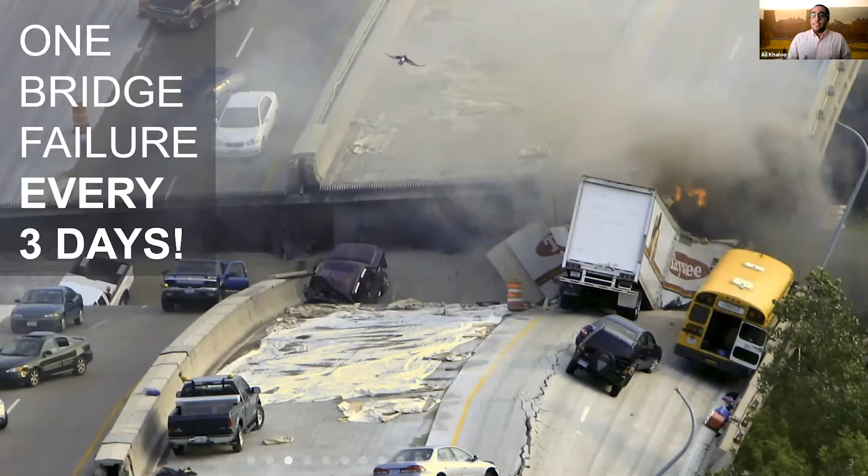So let's take a closer look at why we essentially end up in this mess as a society and as an industry. The current methods of inspection, assessment, and management of infrastructure are precarious and outdated. We have to send inspectors out in the field, and they're using bucket trucks, rope access, ladders to get access to different parts of the asset, and they're using naked eyes to detect teeny tiny damages on miles and miles of infrastructure. After doing all of that, now they have to go back to the office, go through their field notes, go through decades of assessment reports, and see really if the asset is deteriorating or not.

What you're seeing in this slide is, as I mentioned, inspectors out in the field in the first column, and in the middle one is an actual bridge report. And it's not just for bridges - this is the same concept we have for building facades and other asset classes, where the engineer comes back in the office and starts to put together a report, which is not more than the location of that asset and a couple of photos of it. And then what you see on the bottom in the middle is CAD drawings.

So the engineer has to go through AutoCAD, draw the elevation, and also draw the damages that they found out in the field. They took notes on a piece of paper, and now they have to digitize all of that in AutoCAD manually, which is a manual and tedious process.

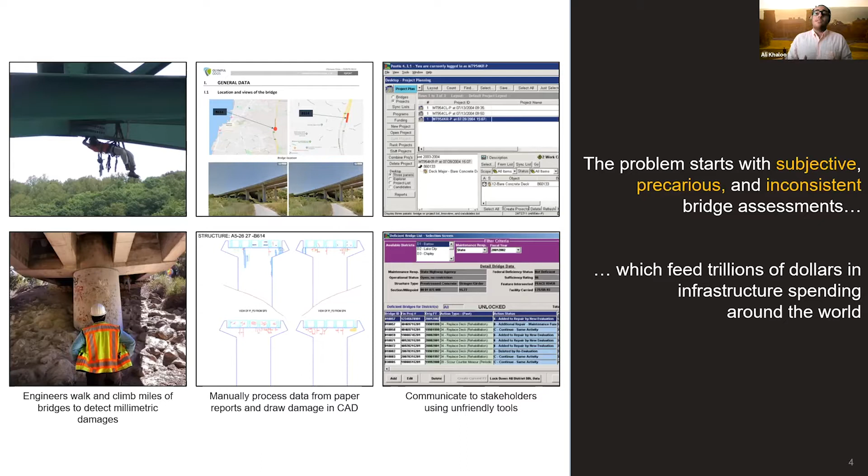And at the end of the day, when it comes down to data management on top of all of this, it's a very much old-school bunch of Excel sheets, which now is hosted in the cloud. So it's very much subjective and inconsistent information that goes in. And at the end of the day, that poor information is what really feeds the maintenance plans. As a result, we lose trillions of dollars of infrastructure budget on an annual basis.

At Aren, what we do is bring our patented technology to tackle all these problems. We are building a business-to-business software-as-a-service infrastructure management platform to assess and manage infrastructure using a unique combination of machine learning, computer vision, and civil engineering. In a nutshell, we are building a digital health record of the asset. Our goal is to reduce the risk of failure while extending the service life of these important assets.

So let me walk you through how our product actually works. First, our software aggregates data that the client provides from different sensors, drones, and laser scanners from an asset such as this one, which is a 60-meter long bridge. What you're seeing here is one of our projects in the Netherlands.

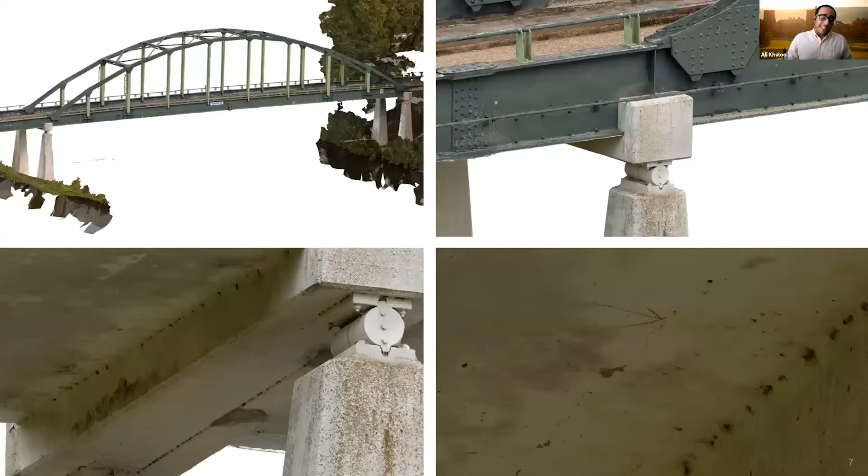Second, our platform can automatically build a high-resolution 3D digital twin of the asset with unprecedented accuracy, capable of capturing millimetric details such as this crack that you see here. On this slide, what you're seeing are screenshots of the 3D model. Let me emphasize, these are not 2D photos - these are actual, accurate 3D twins of the asset.

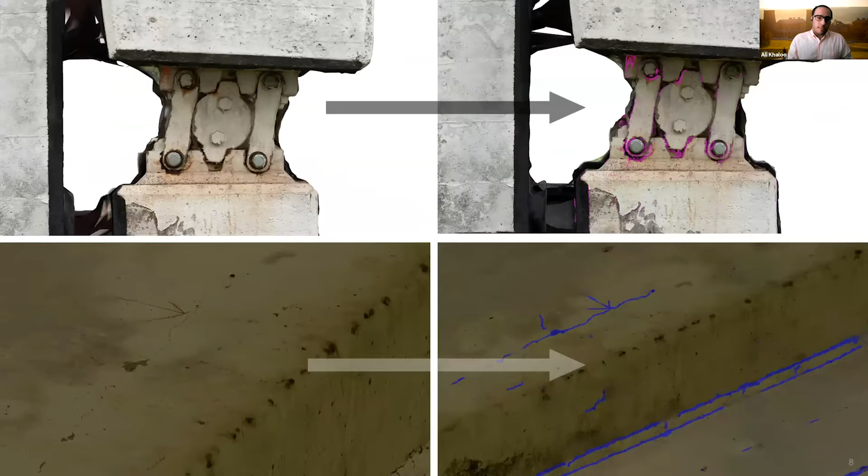Third, by using artificial intelligence, our platform can automatically detect and quantify severity of different damages, from corrosions to cracks. And of course, this is something that we do in 3D and in the context of the assets. And the way that we build our technology is that we can apply it to different materials and to different assets.

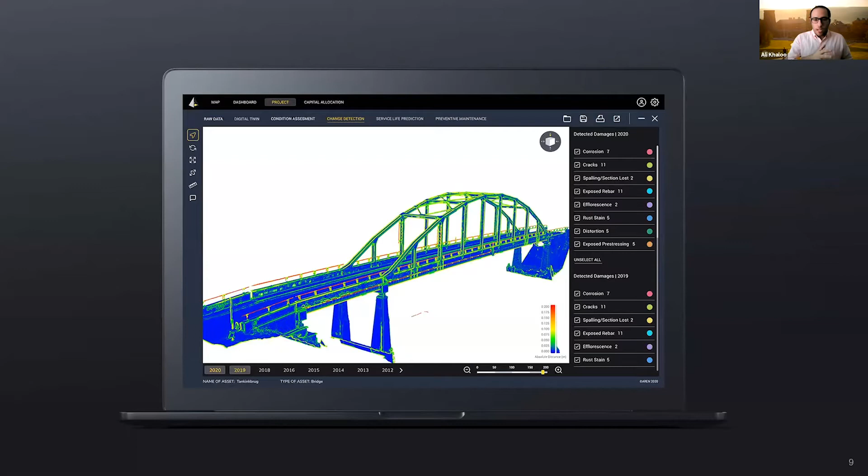We have the capability to quantify changes in time to see how a damage evolves, in order to find and calculate the rate of deterioration to predict future structural changes. In other words, we are providing a historical timeline of the condition of the asset.

And lastly, actionable insights. So our SaaS platform can automatically put together a data-driven maintenance and capital allocation plan in order to reduce the risk of failure while optimizing the spending across the asset portfolio.

In our case, data collection is as easy as taking photos with your iPhone. Everybody can do it, which makes our solution scalable.

Now, instead of spending weeks to assess the health of the asset, the engineers can do it within a matter of hours. Now, instead of having access to the asset once every year while you're at the site, now the engineer can get back to it virtually as many times as needed from wherever they are around the globe.

Our product is sticky because it is mandatory to conduct structural integrity assessments within decades of the service life of the asset. And that is true throughout the globe.

And on top of all of that, our technology is hard to replicate, and it's backed by 10 years of R&D and 3 patents that we have.

So our clients have used our technology to assess the health of different asset classes across the globe, from bridges in Alaska to dams in Maryland to building facades in New York.

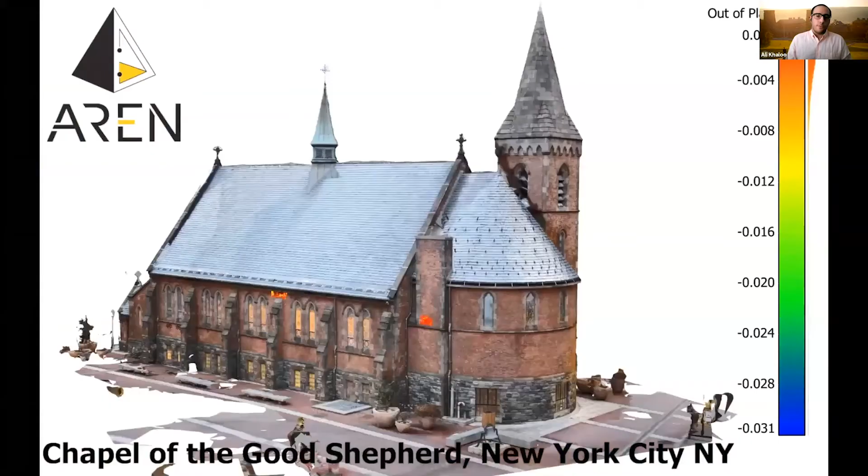So what we ended up doing was using an off-the-shelf point-and-shoot Nikon camera, 16 megapixel. We went around the object, took almost 250 photos in a matter of 30 minutes, came back, and put together in an automatic fashion this 3D model with unprecedented accuracy that you can see all the nitty-gritty details, including that missing brick on the asset. Especially in the post-COVID world, having this digital replica by itself has a huge value.

But as mentioned before, the most important thing is that actionable insight. So what you're seeing here is the heat map of all the damages that we found on the building facade, mapped into 3D, showing the different levels of severity of the damage on the facade. In these two examples that I showed you, the red ones are showing no damage, and you go all the way to blue color showing the maximum amount of damage, which in this case was that missing brick.

And of course, we quantify all of those changes.

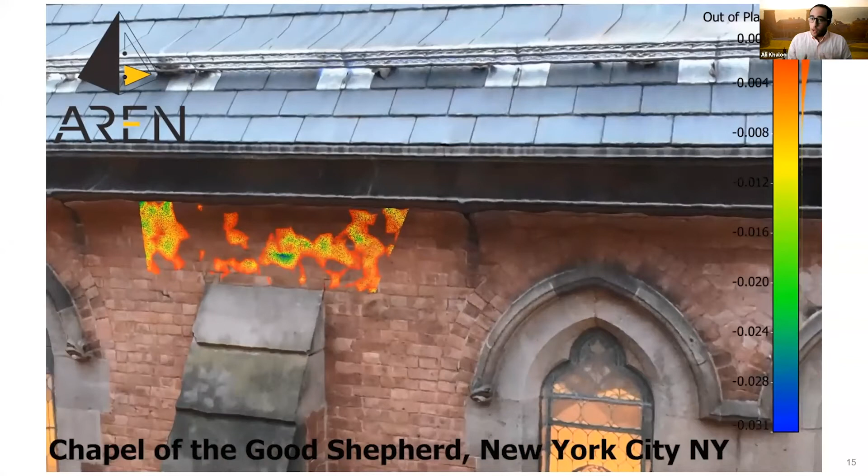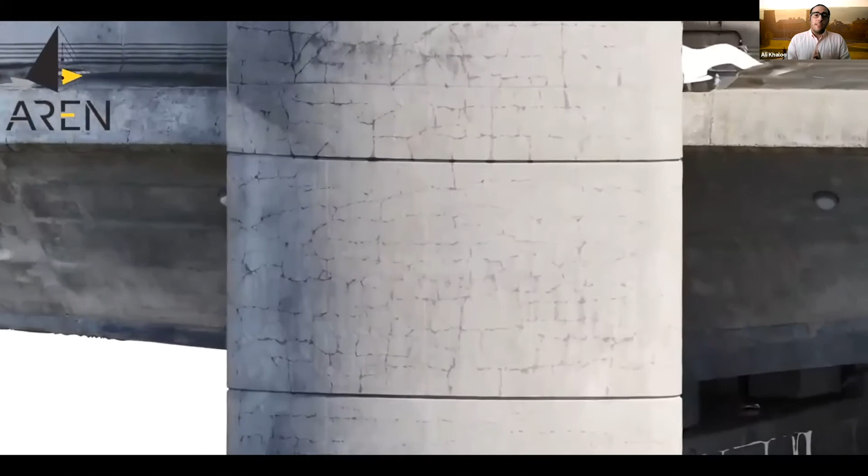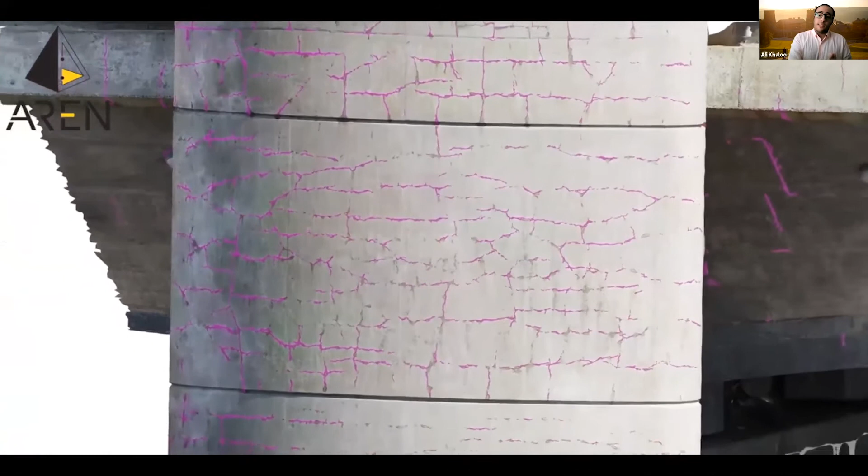Another asset class, this is a bridge pier in the Northeast, and this was roughly a newly built bridge, a $500 million project to build the bridge. Within the bridge inspection community, one of the key things that the inspector has to do is crack mapping, basically documenting all the cracks on the asset, writing it on a piece of note, and also going back to create that CAD model.

So in our case, with the client, we wound up collecting 400 photos with an off-the-shelf drone. We created that highly detailed 3D model that you saw earlier. All those purplish colors are showing the cracks that we were able to detect in 3D in the context of the asset. And now what you're seeing is by hiding the pier, you can see all the patterns of the crack throughout the pier.

This is important from the structural engineering point of view, the pattern of the cracks. And on top of that, what is important is we know the dimensions of each and every one of those cracks, which, if I'm not wrong, on this part of the asset, we had more than 1,000 cracks. And now we have the length of them, the width of them, and of course, the locations of them in 3D.

One of the key things to keep in mind is what happens when an inspector is in the field. I used to do inspections, and our scientific director also has very good experience doing inspections out in the field. So what happens is you're out in the field and you have to eyeball and look for damages in different parts of the asset. Some parts of the asset you go to first because they're more critical than others. But at the end of the day, you start at 7 a.m., and by noon or a little after, you're pretty tired. It's going to be hard to find damages, or you're going to miss a lot.

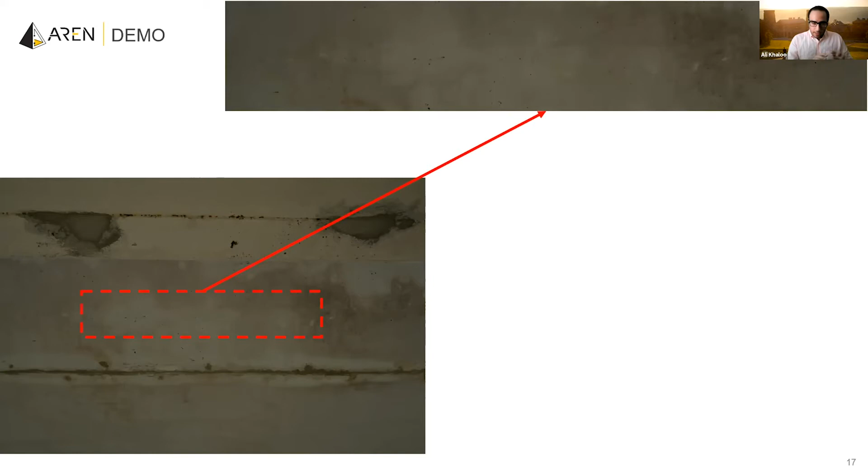In our case, by using our technology, we are moving towards a consistent and objective assessment. As an example, here is a photo from underneath the bridge I showed you earlier, in the Netherlands. In the zoomed-in portion, the red box, if you pay enough attention, right in the middle you should see a teeny tiny hairline crack, which if you're out in the field, there's a very good chance you'd miss it because it's so small. But when that data came into our platform, from that one single photo, you're able to detect that crack, or any kind of damage at that level.

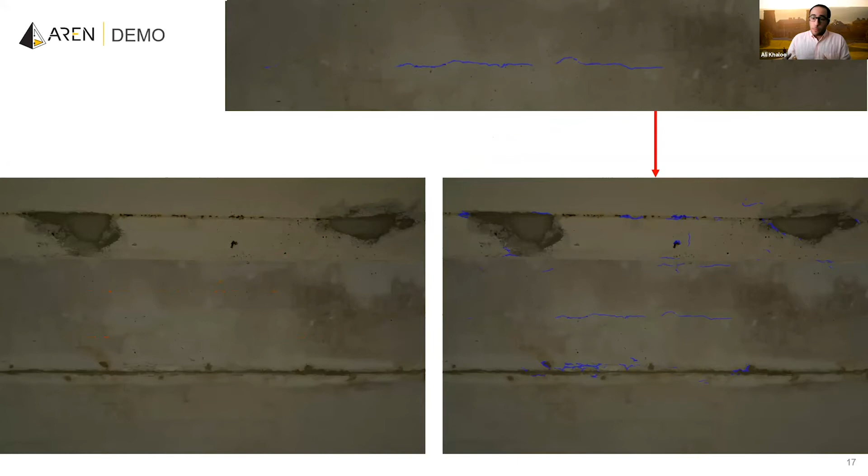It's important to remember that all of these damage detections and assessments happen in 3D. Everything is quantified. So for that piece of asset, we know exactly the areas of efflorescence, the classes of different damages, and their severity. All of that, instead of being in PDF reports or thousands of photos, is now in one single 3D model of the asset.

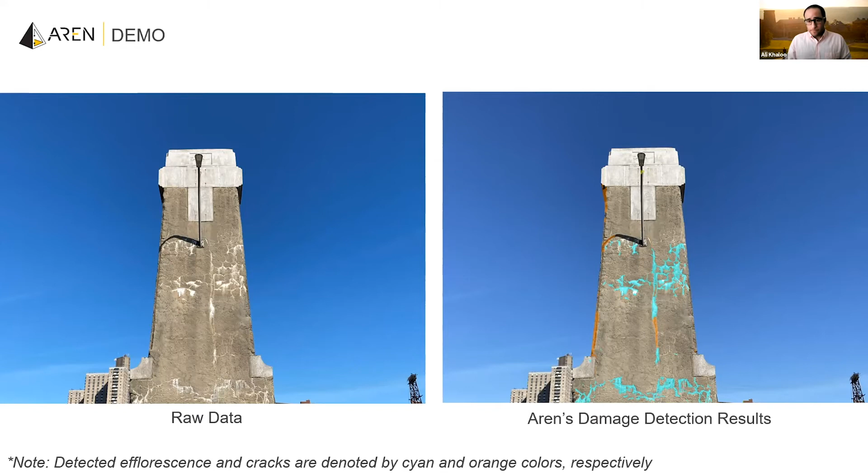When it comes to our beachhead markets, in the US we are focused on bridges and building facades, which account for an $18 billion opportunity for Aren. It's worth emphasizing that our overall goal is to go after the $3 trillion we spend on infrastructure annually.

We started in early 2019, and currently have a sales pipeline of $1.5 million across North America, Europe, and East Asia. We're on track to bring thousands of assets to our platform in the near future. Currently we're working with major global asset owners and engineering firms, including the Dutch Ministry of Infrastructure, who owns thousands of assets in the Netherlands, and a major global industrial firm who has access to 10% of all the bridges globally.

Our team has PhDs in computer vision, machine learning, and civil engineering, and has worked at top-tier consulting engineering and management consulting firms. We are proud to have Cornell Tech Jacobs Institute, Metaprop, and the National Science Foundation as our investors and advisors. We are pushing the boundaries to improve the safety and resiliency of infrastructure around the globe. I invite all of you to join us in our mission. We are Aren, and thank you so much.